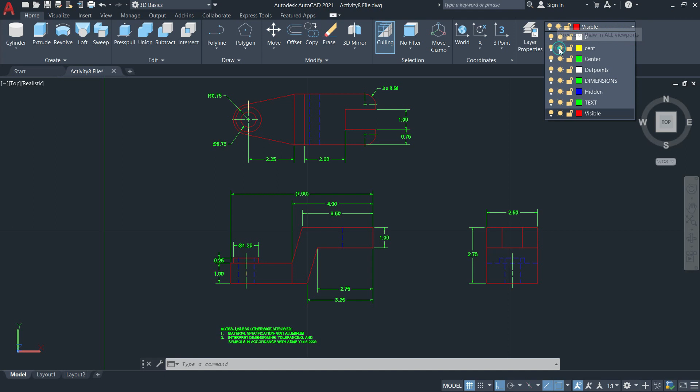So I will be creating this part in 3D modeling, in 3D basics. I will be using the Extrude tool together with Region, and then I'll be using Union and Subtract tool. First I need to freeze the unnecessary layers that are not needed.

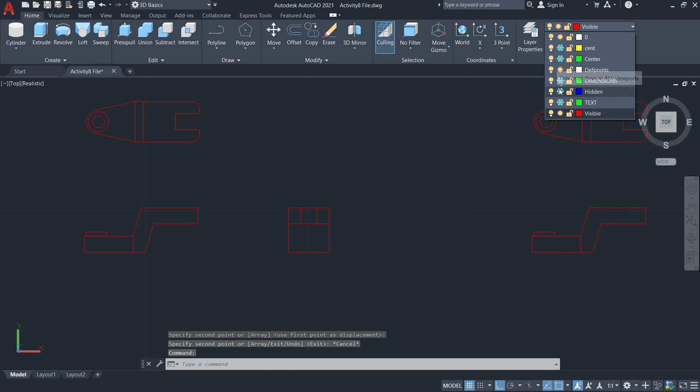Okay, then I'll just copy. I'll just unfreeze the dimensions so that I would know how much extrusion is needed. For example, for this one, 1 inch, 0.25, and so on.

Based on this orientation on its front view, it has this base part and then goes up. So the top part on the top view, that's a cut here. So I'll be needing this orientation, and for the base I will be needing this part, and for the connection between those two upper and lower bases I'll be needing this portion here.

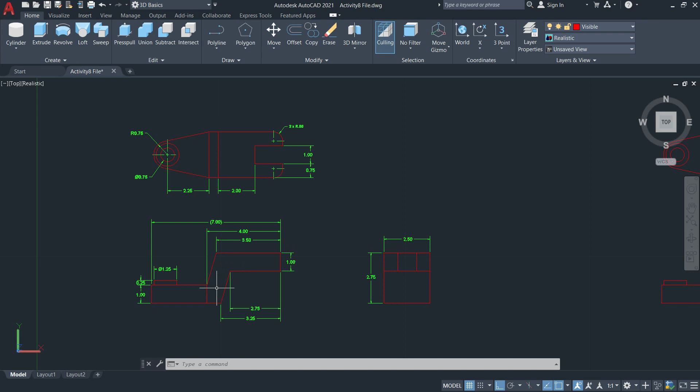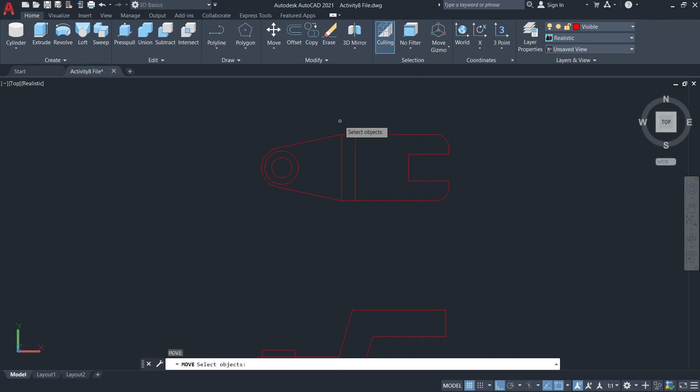Probably I will not be using this right view, so I'll just erase this part, and then I'll just create a separate one using move. I'll just use the move tool.

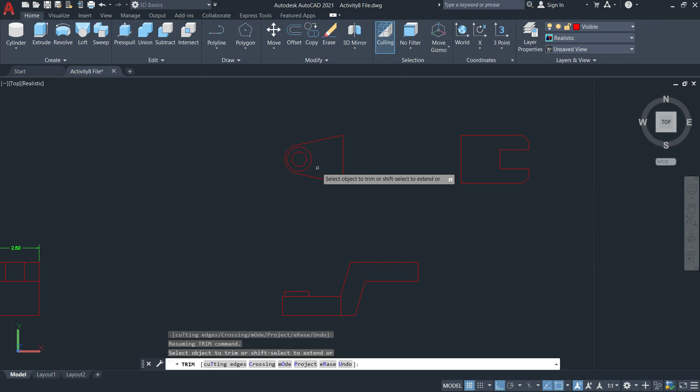So I'll just select this portion, enter, then here, then I'll just trim this portion here and this portion here. So the lower base and then the upper base, then on this part I'll be needing this portion here, so I'll just draw a line.

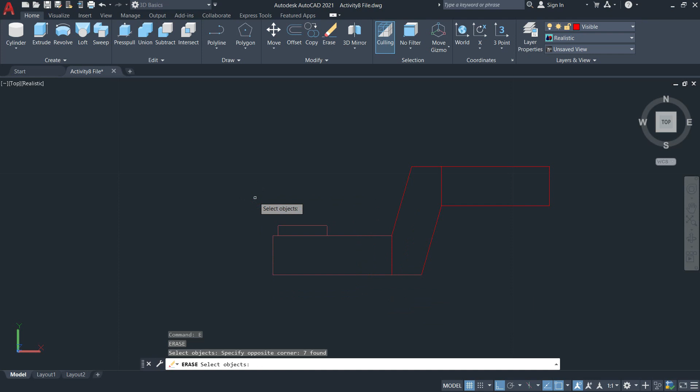Then I'll use trim, then I'll erase these portions. Oops, undo. To erase this portion here, also this portion, then I'll just trim.

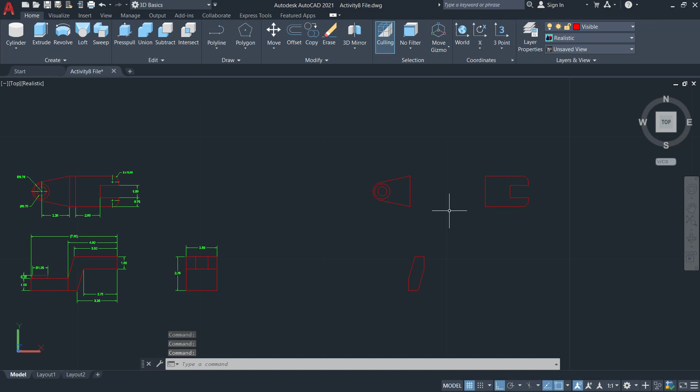Then these are the three parts that I'll be using to create the assembly of this part. So I'll just use the isometric view. If you're in realistic view style, I'll prefer using first the 2D wireframe.

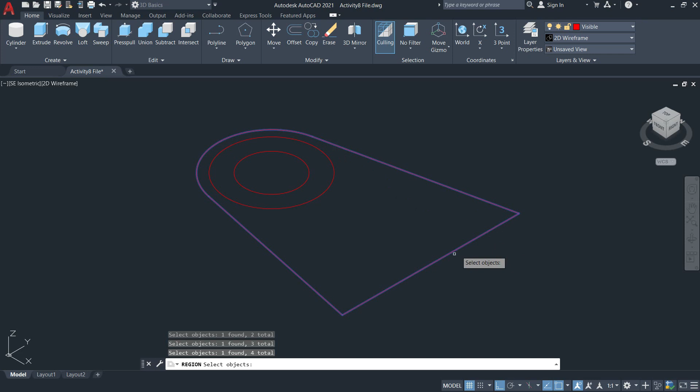This has a thickness of 1 inch for this part. So before I use extrusion, I'll make a region out of it. So for region, I'll select these individual lines, arcs, the outer portion, and then press enter.

Then you can use the extrude tool here. You select this region, press enter, then the height is 1. So I'll select 1, then enter. So I'll go realistic.

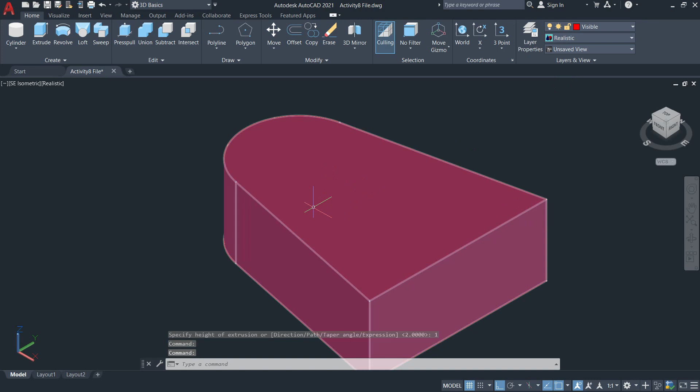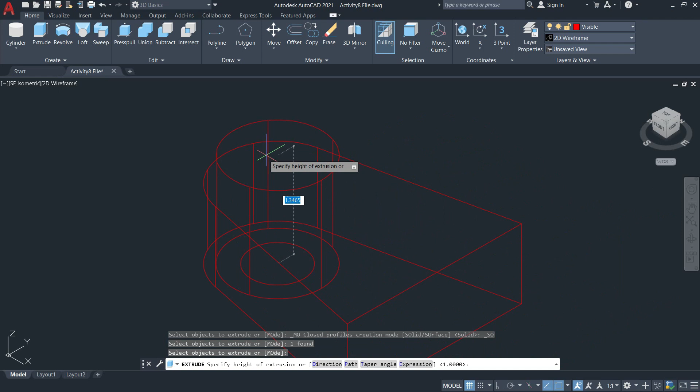I have this model here, but then I'll use 2D wireframe again. Then I'll use extrude, but then I'll use region before using extrude tool. Enter, then region, then select that circle. Enter, then this has a height or thickness of 0.25, but then it's from the bottom portion, so it should be 1.25. So I'll just view it in realistic view.

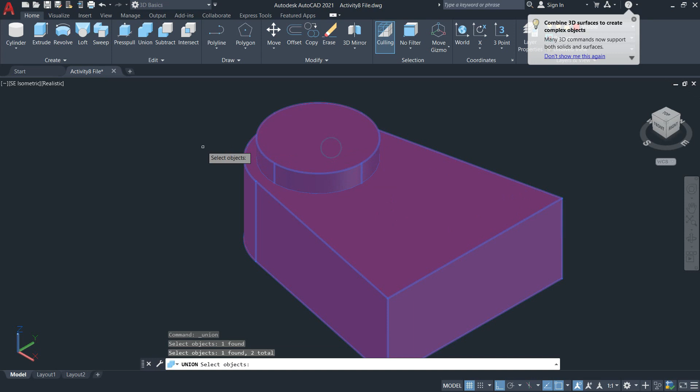There I have it. But then they are individual extrusions, so I'll need to use union. I'll select this part and this one so that they would combine each other. So this is now a whole part.

Then I'll use 2D wireframe again for that particular cylinder. So I'll just create a region, then enter, then extrude. Since this is a hole, I'll be extruding it more than 1.25, let's say 2.

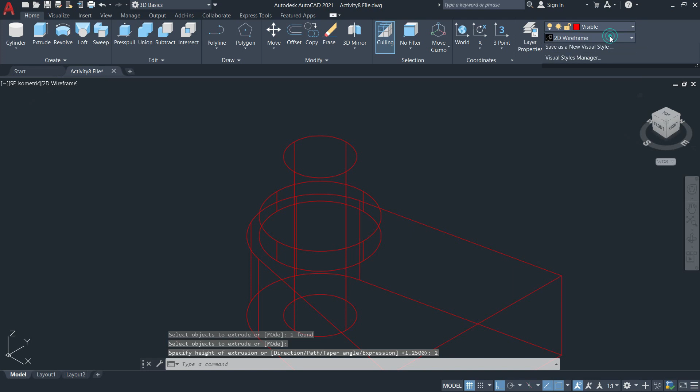And then I'll use the realistic view. Then I'll use Subtract tool. Select this portion here, then press enter. Select the last cylinder that you have created. So you'll notice if I'm going to rotate, you have a hole portion on the part.

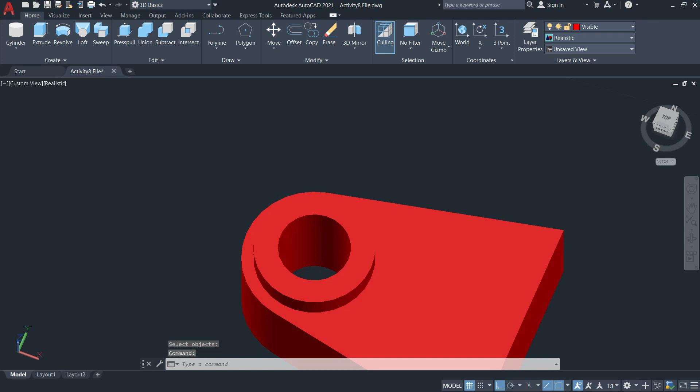Then I'll just view the isometric view again. So I'll just use region. How much is the thickness of this part? Okay, 1. So I'll just select this one.

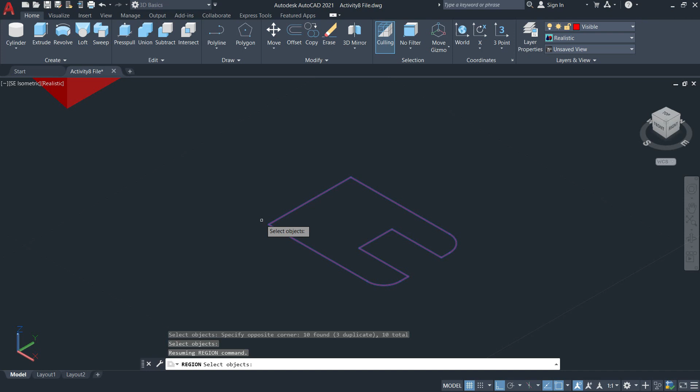Or you can select all, that part, then press enter. And then I'll use extrude. Select this region, press enter, and then the height is 1.

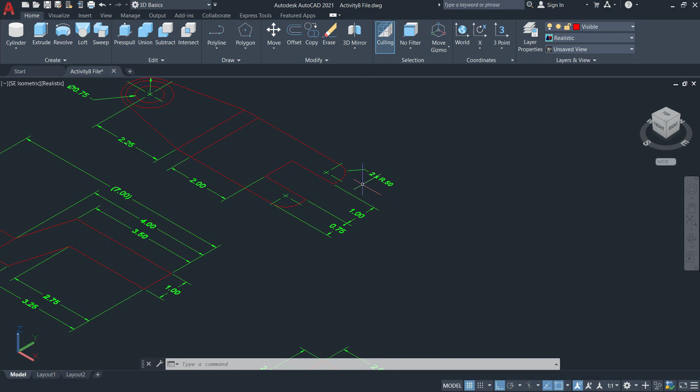Now I would need to create the thickness of this part using this model here. So 0.75, 1, and 0.75 again. So it has a total of 2.5 right here. Okay, so 2.5. So region.

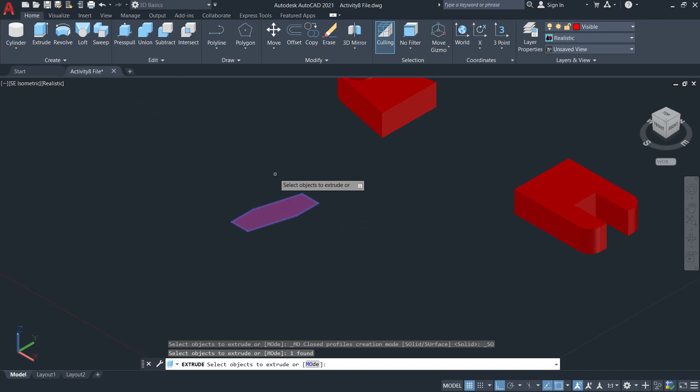Select them all, then enter. Then I'll use extrude. Then enter. And then that is 2.5.

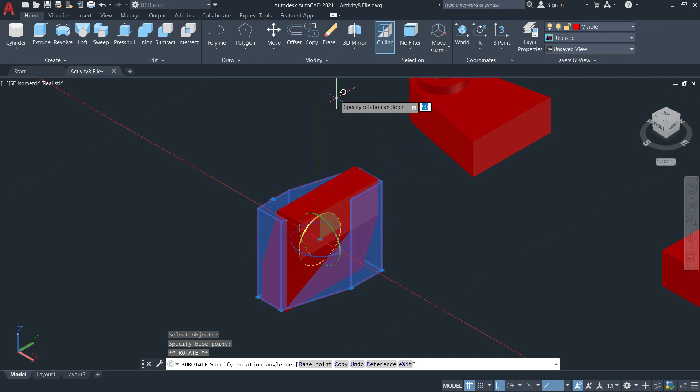Now I will assemble them. I'll just use 3D rotate. Select that object. Then on the y-axis it should be rotated 90 degrees. Then escape key.

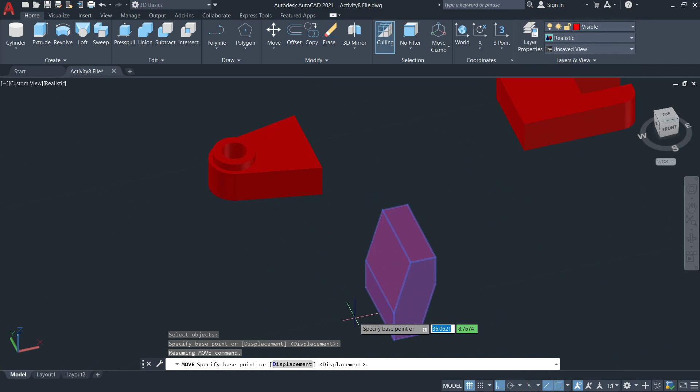There I have it. Now I'll be combining them using the move. Select this object, then I'll just rotate. So I'll just connect it to the midpoint, then midpoint of this part to this part.

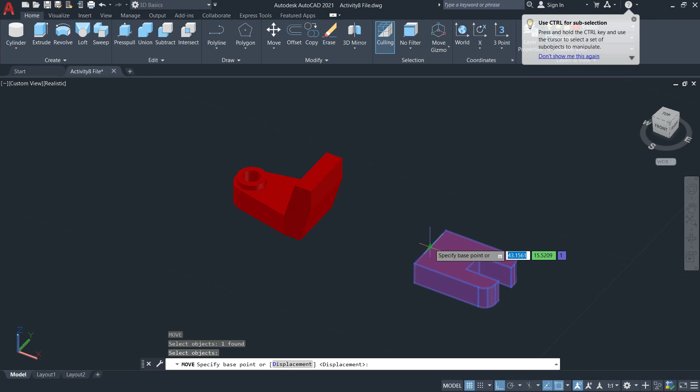There you have it. Now similarly move. Select this object, the midpoint, the top face, connected to that top piece. So I'll just remove the ortho mode. And then here I have these combined or assembled parts of that given particular views.

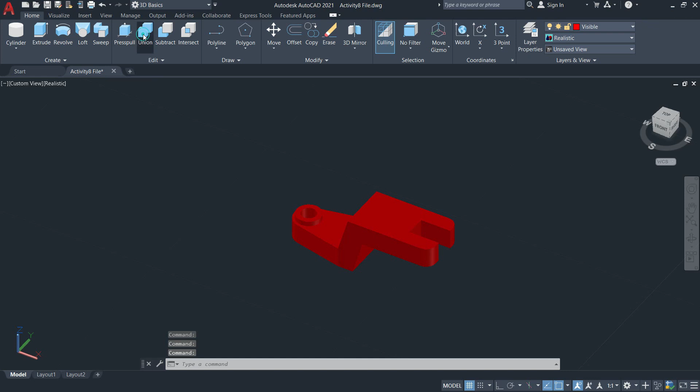So I'll just use the union tool, select those 3 parts, and press enter. So this becomes a single part only. Then I could move this portion here and place it near here. There I have it.

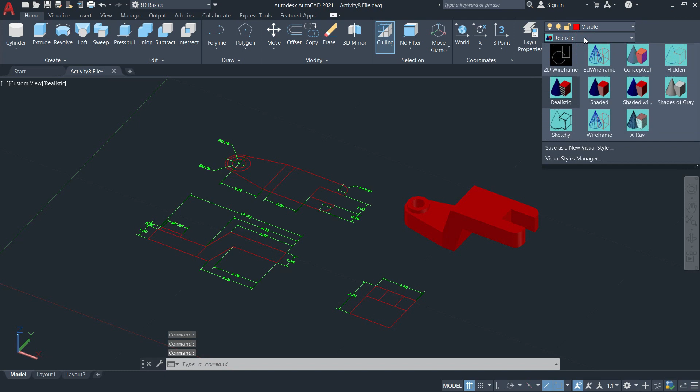So I have that. Let me just say that is sketchy, or you can view it as hidden. I prefer shaded with edges. Now save the file.

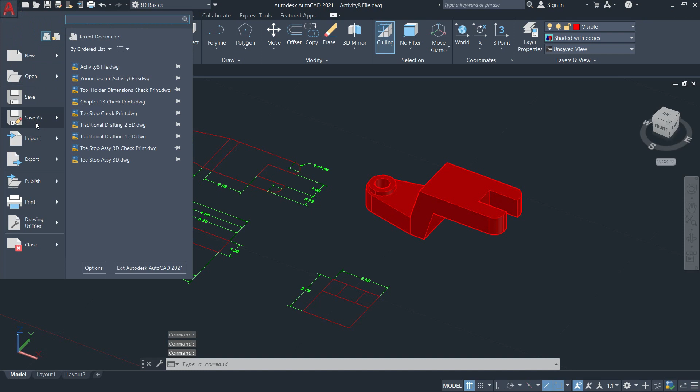Let's say this will be activity 8. Then save. Then you need to submit it. Once you're done, you can submit it.